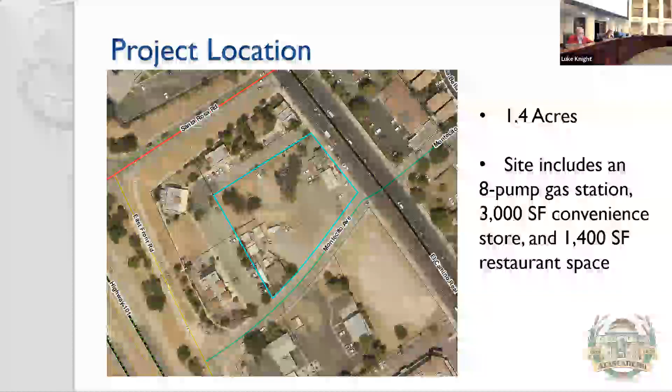Just a little bit of context here. This is a 1.4 acre lot, which includes an 8 pump gas station, 3,000 square foot convenience store, and 1,400 square foot restaurant space. As you can see in this aerial imagery, neither our GIS system, Google Maps, nor Bing Maps has an updated aerial quite yet. It's a very new build. The best we could get is kind of a dirt lot here, but just imagine a gas station.

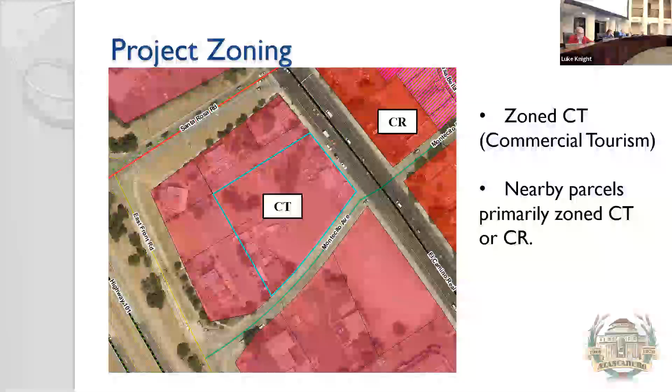It is zoned CT, commercial tourism, and nearby parcels are primarily zoned CT or CR. As you can see on the southwestern portion of El Camino Real, it is largely CT, commercial tourism. To the northeast, largely CR, commercial retail.

So just a bit of a summary here. The applicant is proposing 768 square feet of signage and chroma color banding around the gas station canopy, as well as a LED lighting strip. These current requirements that this project is being compared to are based on a 2019 design review committee hearing for the gas station itself, under project ID pre-19-0034. During this hearing, the design review committee recommended the removal of the high chroma banding that we are now discussing today.

The proposal is identical to a previous administrative use permit, project ID 22-0063. However, we are here at Planning Commission rather than an administrative use permit hearing, essentially because this is an appeal. It's not technically an appeal, but in a practical sense it is. The applicant missed the 2-week appeal period and is now resubmitting for reconsideration. It was determined by staff and by our community development director that this should be escalated to Planning Commission, considering this is essentially an appeal of that prior administrative use permit hearing denial.

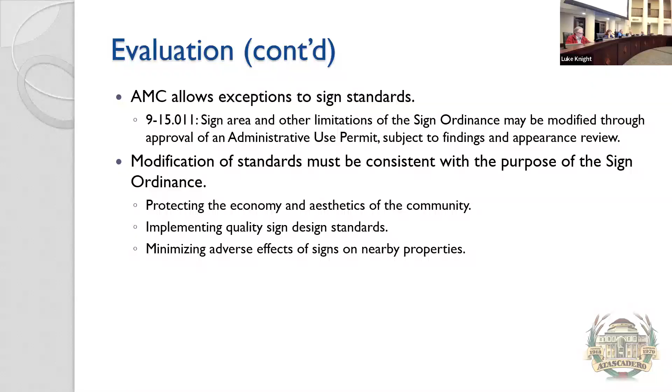Additionally, Atascadero Municipal Code does allow exceptions to sign standards. Section 9-15.011 notes that sign area and other limitations of the sign ordinance may be modified through approval of an AUP, subject to findings and appearance review. The modification of standards must be consistent with the purpose of the sign ordinance, which can be put down into 3 bullet points: protecting the economy and aesthetics of the community, implementing quality sign design standards, and minimizing the adverse effect of signs on nearby properties.

So the canopy coverage area of this gas station canopy is 4,388 square feet, and it contains 8 pump islands, as I mentioned in a prior slide, and that makes it one of the larger canopies in the city.

All of our recent canopy permits and use permits issued for canopy amendments have adhered to maximum signage requirements. There haven't really been any exceptions made in recent years. So this would be somewhat setting a precedent as to making exceptions for signage requirements on gas station canopies.

Now, as it is today, the station is directly adjacent to El Camino Real and is readily identifiable as a gas station, and specifically as an ARCO station, with the existing signage.

At the previous administrative use permit hearing, the hearing officer found that the proposed signage increase was inconsistent with the required findings that need to be made in order to approve an increase like this. There wasn't one specific finding that it was found to go against, but all of the findings that were provided, the administrative hearing officer found that they weren't met by this project.

So here are the findings that would need to be met in order to approve this project. The first is that the modification of the applicable standard won't result in a project that's inconsistent with the general plan. That the modification of that standard won't result in a project that is inconsistent with the character of the immediate neighborhood or contrary to its orderly development. And lastly, that it will not result in a project that is not in compliance with any pertinent city policy or pertinent city criteria adopted by ordinance or resolution of council.

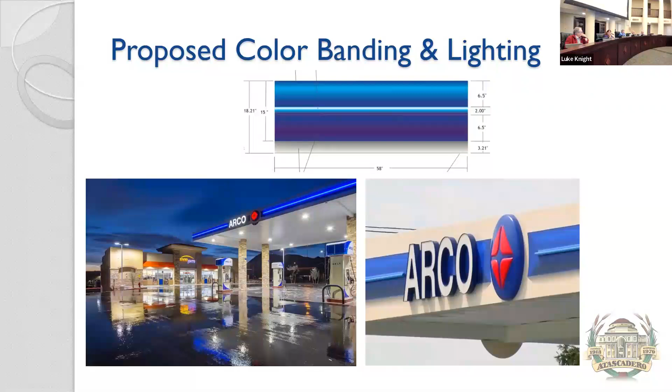I have a question and a comment. The banding allowance now is how much, compared to the 748 extra square feet they're requesting? So as I understand it right now, let me go back here - I believe it is 20 square feet of signs, logos, and/or color banding on no more than two sides of a Pump Island canopy structure.

Okay, and the question I had about the lighting - I'm not so concerned about the color banding because that's neutral. I'm worried more about light pollution at night. From someone who lives right across the street from a gas station, it's a big difference between seeing a flashlight in a field pointed down and seeing a flashlight pointed at your house. Big, big difference. The fact that these lights would be exposed horizontally versus - you can have way, way bright lights pointed down, but they don't wash out across fields.

You'd have to look in that direction to see them, but they're not washing out from the perceived eye - it almost is a background light. So I'd be leaning towards not worrying so much about the color banding, that's kind of a daytime notification for people looking for something that stands out. But the nighttime light, I'm kind of concerned about that being distracting to people living in the area, especially up on that hill on the back roads - you can see that from pretty far away.

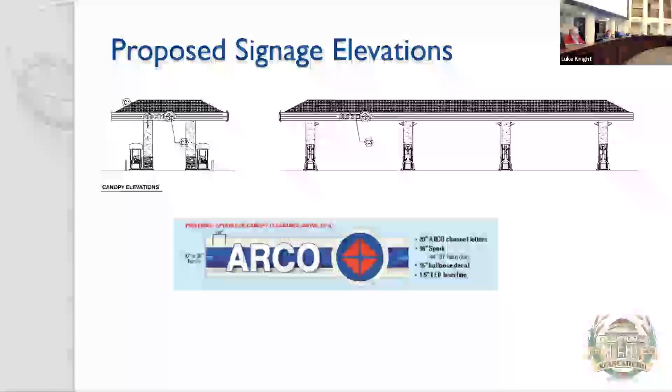And I am not including the recommendation of staff to recess or modify the lighting in the way that's suggested in that condition. Can't quite understand it. So just to be clear, you are making a motion for the approval resolution, but with the exception of that condition to shield or redirect the light. Is that correct? Okay.

I will second that motion. Does that include changing in the conditions CUP to AUP? Yes. Commissioner Schmidt, yes. Vice Chairperson Keen, yes. Commissioner Anderson, no. Commissioner Heath, no. Chairperson Vanden Eyck, no. Motion fails.

The only thing that got me on that, if we can have just a discussion, was no shielding of the light. Actually, if we could do it with no light at all, I think I could approve that, no problem. But I'll make a motion that we approve draft resolution B as outlined.

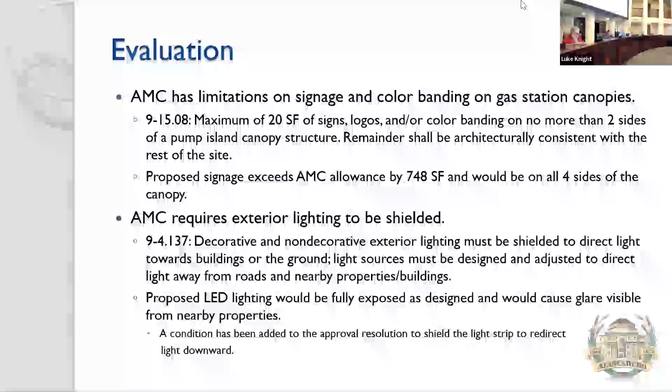that we have is our objective design standards. So we're going to turn that over to our community development director for that. Yes, and then I'm going to turn it over to our planning manager, Kelly Gleason, to present objective design standards. But first, I'm going to pick on one of you, like I mentioned before, to outline a clear definition of objective versus subjective, Commissioner Schmidt.

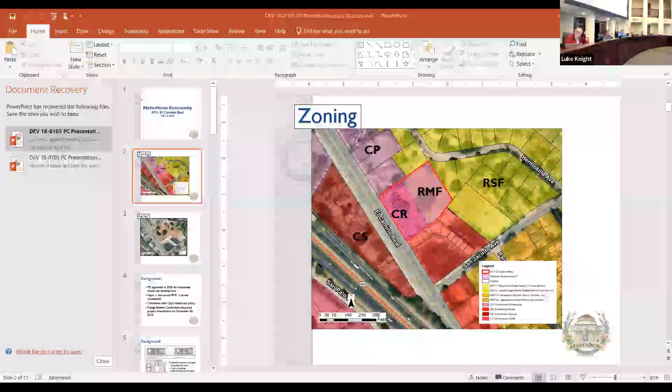So that's what this discussion is really about. It's about objective versus subjective, but Kelly's going to give you a lot more detail than that. It's actually quite interesting. This is really a streamlining of permitting and design review so that we can actually entitle projects without having to go through a discretionary process like this. Anyway, I'll leave you to it, Commissioner Schmidt.

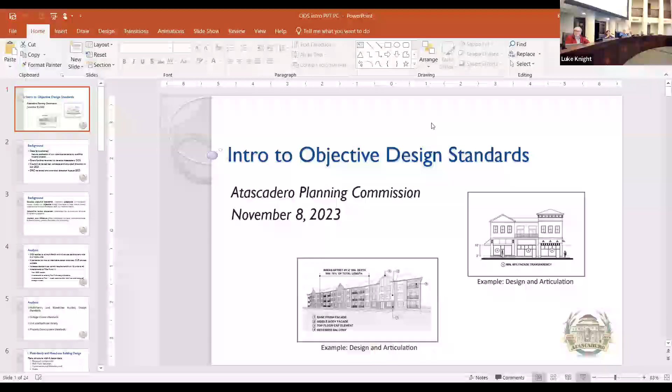Well, before we release that, Kelly, you've kind of summarized it yourself. I would say if there are subjective requirements or conditions, they're discretionary, whereas objective conditions are not discretionary, and we're not choosing to use them the way that we might individually feel. I would imagine that the objective conditions we're talking about fall within categories, so there might be a category with 4 objective conditions within it that you can pick from to apply to your project.

Perfect. Thank you. I think we can have more commissioner comment when we get to that section. But right now we've prepared a presentation to go through an introduction to our objective design standards. We've been working on this project for quite some time. It's a grant funded project we received to complete with our consultants, MIG. We've developed draft standards that we're introducing you to this evening so you can have time to ponder them and think about them. Then we'll be bringing a draft back as an ordinance for recommendation to the city council with any suggested changes you might have this evening incorporated.

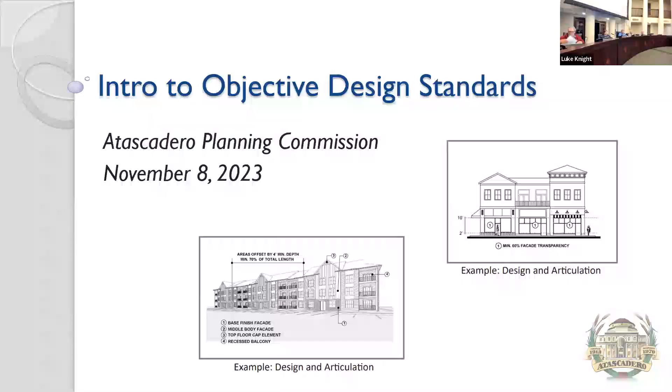So a little background: there have recently been state laws adopted that apply to certain housing projects, not all of them, but certain ones. Some require application of only objective standards to specific housing developments. A lot of those developments either include affordable housing or meet some other criteria. The city did receive grant funding to develop objective design standards for Atascadero. Even though only certain projects are subject to these standards through state law, we are writing design standards in the city of Atascadero to apply to all housing projects. We are looking to make more housing projects ministerial rather than discretionary, so there is certainty in application of design standards, allowing housing projects to move forward in a more streamlined way.

The city council reviewed key concepts developed by MIG through discussions with the council and the public, and provided direction in July of 2022, which seems really far away right now. We also took these draft standards to the design review committee for comment and made a couple of modifications based on their input.

A little background on objective design standards: these are objective standards, so we can't have some 'shoulds,' we can't make it consistent with something over here. We have to be very clear about what we're looking for—numerical values, material changes, how many materials or colors you can use on a building, very specific roof forms, very specific setbacks. I know they look really long, and I know you've got them in your staff report, but this is the way the state is going to provide certainty to developers, applicants, property owners, and the city about what can be built, to streamline housing development. We also get a chance doing this to impress some local influence.

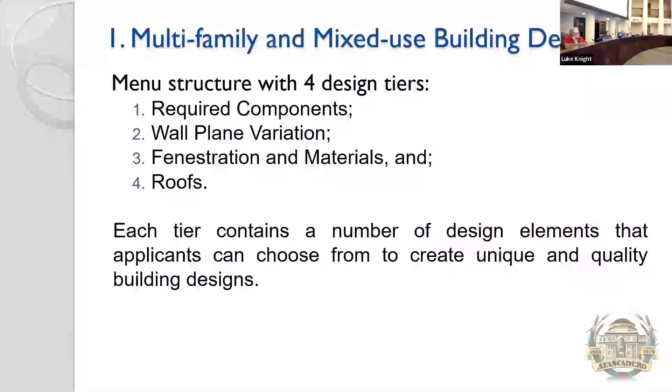Some attention to wall plane variation to ensure that larger buildings are broken up in a manner that helps create and maintain a pedestrian scale for these projects. Fenestration and materials, so how we treat the facade with windows, different colors or different material choices, and then how we deal with roofs. Each of these tiers contains a number of design elements that people can choose from, and there's a different amount that you choose based on the size of building that you are proposing.

So this is a little bit of the breakdown of how that would look in terms of a menu. Our consultant has created some categories for types and styles of buildings, larger buildings such as mixed use buildings. We've broken that into a couple different categories based on the width of the building to ensure that we maintain some flexibility and don't over analyze the standards and apply them for buildings that are narrower in width.

We also have the multiplex, which is 5 or more units within one building, and again, different standards for longer buildings rather than more narrow buildings. And then we have the duplex, triplex, fourplex, and cottage cluster, which would be smaller scale units, and you can see those have less standards that they are required to meet.

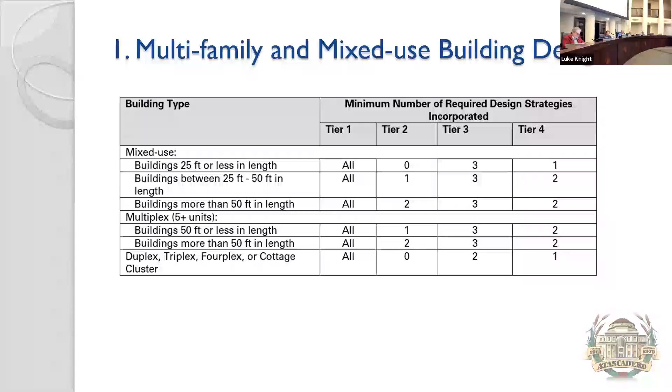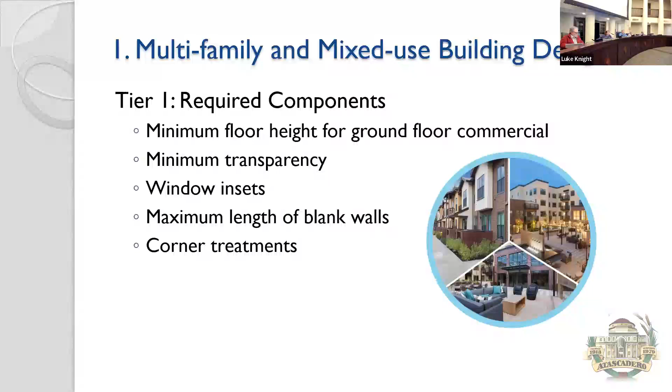So in terms of tier 1, these are required components. In our menu of options, we relate to things such as minimum floor height of ground floor commercial uses when you're in a mixed use building, to ensure commercial and economic viability of the ground floor commercial spaces in those types of buildings. We have standards related to minimum transparency, so ensuring that we have windows and proper facade detailing to create good aesthetics. Window insets, small details that make big differences on buildings that can be done to every building to ensure that we get some shade and shadow that provides some good visual cues. Maximum length of blank walls, and then corner treatments where buildings are located on the corner of two streets. So these are kind of elements that all buildings need to incorporate, kind of the baseline.

In terms of tier 2, we have design strategies related to wall plane variation, the facade of a building.

I don't think that that should be changed. Sam, sorry, give us one second. I want to make sure we're still recording.

These strategies include incorporating a plaza or forecourt, some sort of setback within your building plane that provides variation and places for people to gather in outdoor use spaces. Upper story step backs create variation along the upper floor of buildings. It could be the inclusion of balconies along a facade that create shade, shadow, and undulation within the facade itself, or another sort of general massing break within the building design.

Somebody could bring a whole section of the building forward or backward to create that massing break. In Atascadero, we hear a lot about the importance of the brick facade and maintaining that colony architecture connection, even if it's not in the same architectural style. So we provided some allowances and credit for people that wanted to do a full brick facade building to fit in with that Atascadero identity feature.

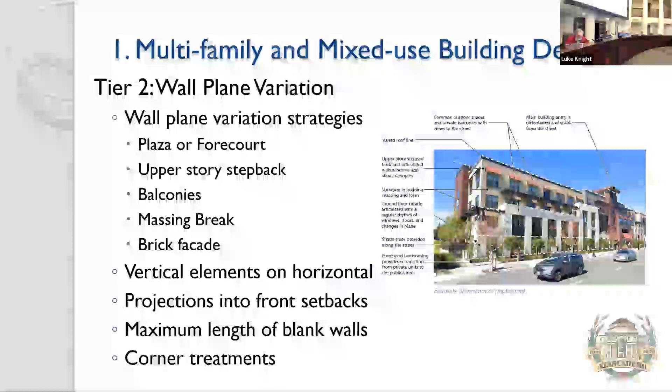Tier 3 focuses on fenestration and materials. We have things that are additional to a facade, like awnings. There's a credit if you increase the area of transparency beyond the baseline level to add more windows and more variation along the facade. The use of window trim, higher quality window materials, lintels, windowsills—these are tinier details around some of those typical facade detailings and features.

Decorative facade trim, some cornices, secondary cladding material. So we're starting to get into materials and things that we apply to a facade to enhance some of the features as part of the design.

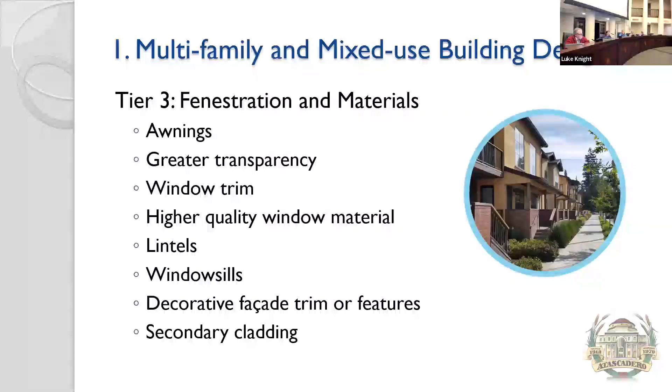Our last tier is roofs. There's a lot of variation you can do with roofs that create shade and shadow. There's also benefit to some flat roofs and roofs with parapets, especially when we think of a downtown type streetscape. So we wanted to make sure we allow for both, so that we're not taking away a design consideration within any portion of the city.

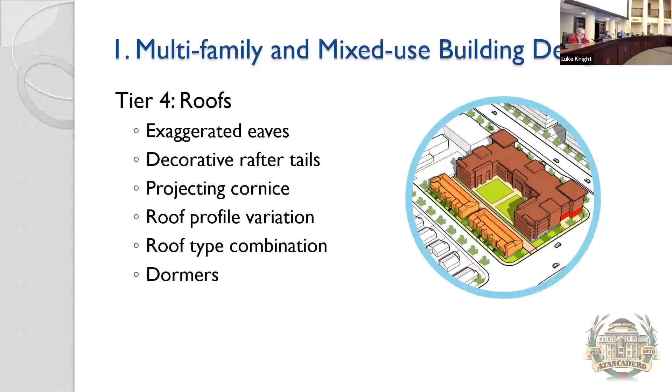Some of the things we can do with roofs are exaggerated eaves if we have a non-flat roof, or even a flat sail type roof, decorative rafter tails, a projecting cornice applied to flat roofs and roofs with parapets similar to what we see in the downtown area. Some roof profile variation—differences in height or slope of roof—and roof type combination. So maybe we have mostly a flat roof with a parapet, but also a shed roof over a corner feature or tower element at the corner. And then the inclusion of dormers, which is probably most applicable to a residential style design.

What we've done is add some additional standards for what happens within those features—some definitions to ensure people know when they need to add an entry feature, what does that exactly mean? If they add a porch, what does that mean? What are the standards for porches? What does it mean to add an awning? What does it mean to have a balcony? Does a Juliet balcony count, or does that not count? So we've added some standards and definitions for some of those features referred to in our menus of options. And in particular, we also looked at building height.

We've heard from council and the community that the height in downtown really needs to be increased to create a greater sense of place and have some additional opportunity for larger scale mixed use developments. So part of this objective design standard update is to increase the height in our downtown core to 55 feet, with some allowances for roof projections if somebody wants a non-flat roof. We will not be increasing height in other areas of the city until the general plan update, if anything comes out of that.

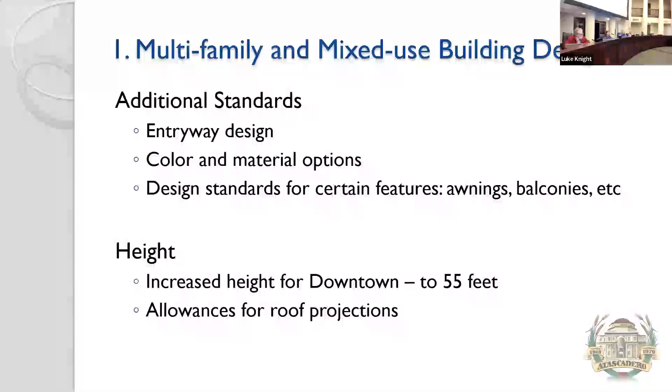One of the council's key directions was also to look at transitions between our multifamily and mixed use zones and potential adjacent single family zoning designations. Our single family lots tend to be slightly more rural in nature, and when they are placed next to multifamily or mixed use commercial zoning designations, there can be some incompatibility in terms of building design and massing.

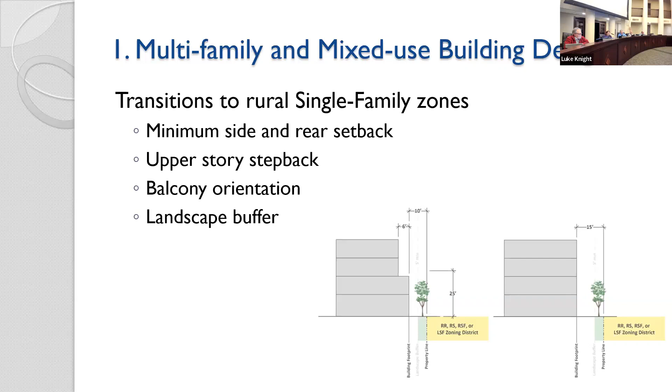So we do have a section related to transitions to rural single family zones that would require some additional step backs of the upper floors of buildings, or require a greater setback for the entirety of the building, ensuring that there is some landscape space area as well as additional setback to the upper floors. The standards also talk about balcony orientation, to make sure that on a mixed use building we don't put all the balconies right up against the backyard of adjacent single family properties to the greatest extent possible. And again, that landscape buffer ensures there's enough area for some taller or more dense shrubs and trees to grow.

One of the concepts that we've worked hard on with our consulting team is the cottage cluster development style. We have a lot of interest and there's been a lot of intrigue about our microhome development on the north end of town, regardless of implementation. I think the site design was very well received for that project. And so we wanted to give people the opportunity to move forward with similar type developments, where they are individual cottages or duplex units oriented around common open space areas, with minimal private yard space and reduced attention to vehicle and access spaces.

So we developed standards for a cottage cluster development. If you are doing single family or duplex units, a majority on a multifamily site, there are certain standards for how those units are oriented, how much common open space area is available, and what kind of fencing you can do within those standards. If you meet those standards, we would then allow subdivision of those styles of development. Currently our minimum lot size in the multifamily zone is half an acre, and if you met these cottage cluster standards, you would be able to do sort of a postage stamp development - the footprint plus 3 feet, or whatever building code would require based on the design of the subdivision.

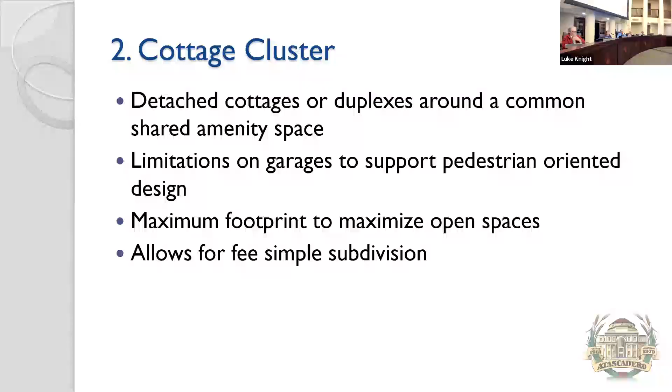Part of those standards also include a maximum footprint area, in order to maximize open spaces and ensure that there is balance between the usable private unit areas and what space is taken up with buildings, and the common open space amenity areas, to ensure that there's some quality spaces to enjoy as part of those developments.

Fractional density was also a big topic at the city council. Fractional density basically uses unit size to determine the allowed number of units. Right now our density is solely based on the number of units, so 10 units per acre would mean 10 400 square foot units on an acre, or it would mean 10 2,100 square foot units on an acre. We don't differentiate between what that might look like in terms of the area that gets developed - it is simply how many units you can do on a property.

So the use of fractional density allows us to count smaller units as less of a density unit. You can see in the current proposal, units up to 600 square feet would only count as half a unit, so you could do 2 600 square foot units where previously it just counted as 1 unit. This allows a greater number of units to be developed on a site under our current density standards. It encourages smaller units, it encourages affordability by design, and it encourages maximizing the footprint area that you can build within, to maximize the number of units that you can achieve.

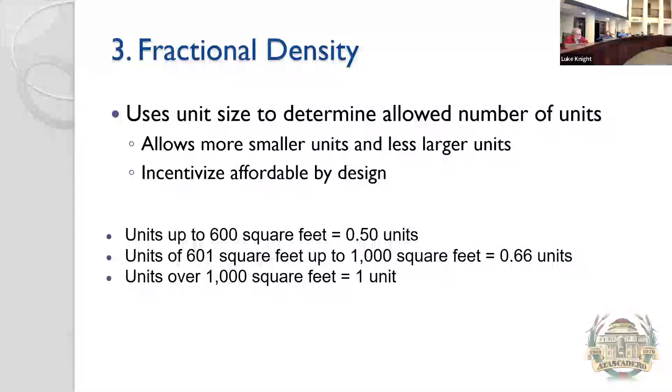Under our fractional density section, the way we currently have it written is that fractional density would only apply to the high density residential zone. There's a couple pros and cons to applying it to our medium density residential zone. We will also probably have more residential multifamily zoning districts coming out of our general plan. So we are seeking direction from the commission on whether it's appropriate to apply fractional density to our medium density residential zone.

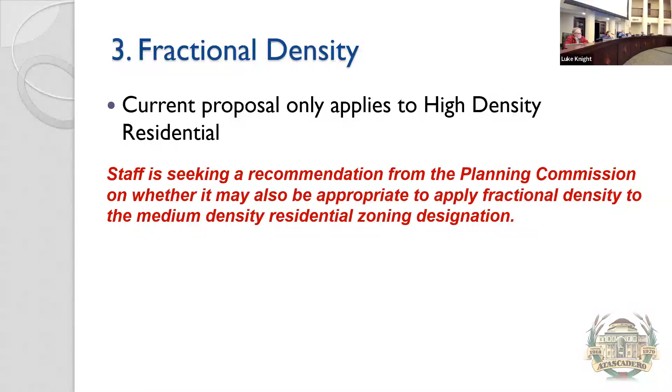Our medium density residential zone is generally that transition zone between single family and multifamily. So there's a certain level of analysis on whether it's appropriate to have more units. They're not necessarily taking up more space. They still have to fit within the same developable box area, the same height, and still have to meet parking requirements. But is there a disadvantage to having more smaller units in those transition areas? Or is there not? We're seeking Planning Commission's direction on that this evening.

As part of fractional density, we also have a maximum average unit size applied to the downtown area. This was the direction given by council to apply it only to downtown to encourage smaller units in the downtown core. So fractional density would also apply as an incentive, but they looked at capping the maximum average unit size to 1,200 square feet in downtown mixed use development. That doesn't mean any unit can't be larger than 1,200 square feet. It just means that if a unit is larger than 1,200 square feet, there needs to be another unit in the development that balances it out to the average of 1,200 square feet.

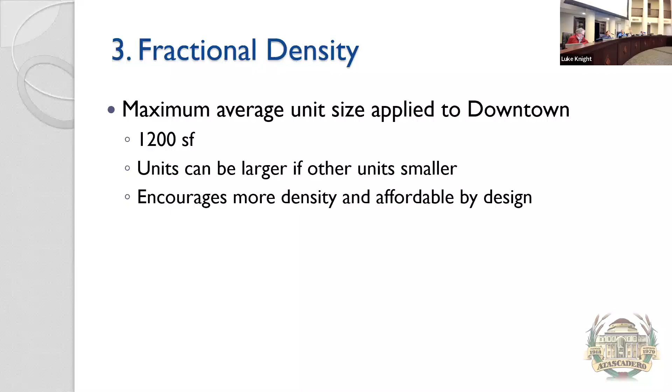Property development standards. I feel like I'm talking at you guys a lot. Maybe it's time for just a pause and a stretch. Kind of raise your arms up a little bit. There is a lot here. We've been working on this for years, and that's kind of why we're bringing you a piece of it right now. We're kind of introing you to the whole thing. If I were you, I would be totally perplexed.

You'd be kind of like, what is all this stuff? We're going to go back. She's going to rip through the whole thing, and then we're going to go back and forth through some of these themes. There's some big ones here, like fractional density is huge. All these things are big. We were going to come through and make a recommendation to you tonight to make all these changes to the zoning. But I thought, you know what, we stepped back and said we got to bring this as an intro, warm up to it. Council's seen this a couple times. We've been batting this around for a year or two, but now's your chance to kind of just look at the general picture where this is going. And then we're going to come back to you with an ordinance.

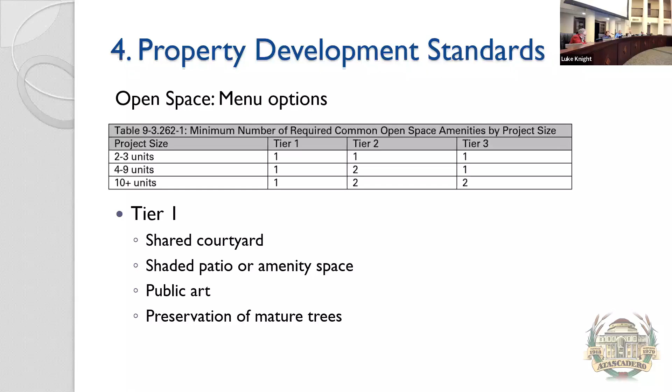We also have the allowance for public art, so if somebody wants to incorporate some public art into their project, that would be a quality shared amenity as well. And then the preservation of existing on-site mature trees, to allow for those sites that do have mature trees and mature shade canopies to have some flexibility around their design and not have to necessarily overdevelop amenity spaces.

In terms of tier 2, we have things like outdoor seating, things that add to the amenity level of those spaces. Dog runs, children's play areas, sports courts, which would probably be more on a larger scale project, we would see that. Pools or spas, an outdoor kitchen, and we provide definitions for what an outdoor kitchen is. It's not necessarily a hibachi barbecue on the ground in the middle of some pavement, it would have some amenities with it that help support that as an outdoor kitchen.

A fire pit, which is very popular today within amenity spaces, and again the preservation of native trees, so not just focusing on any mature trees, but specifically native trees in this tier.

We also wanted to ensure we had an allowance for smaller projects to use their shared driveway area as a shared amenity space. Some of our lots are very narrow, and in order to meet density and parking requirements, we see a lot of configurations where there's a shared driveway down the middle of a project site and parking off to the side. So for smaller projects that don't have space to be flexible with other outdoor amenity areas, we added a parking court allowance, provided that driveway space had certain design features like pavers or stamped and colored concrete, and that the parking could be accommodated off of that area so it could be used as a neighborhood gathering space.

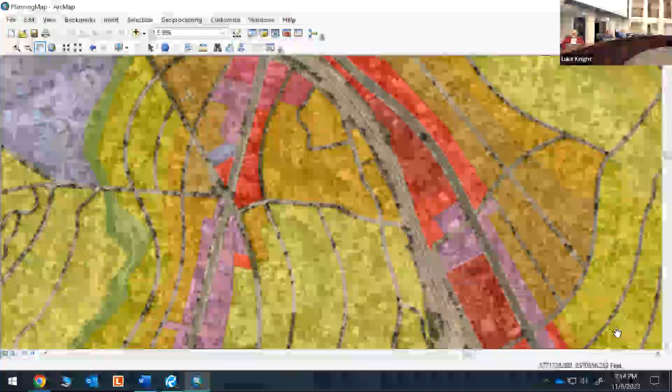It's very difficult, because objective standards by their nature cannot be flexible. So we came up with the menu to try and add some of that in. We also hope, by the time we come back to you, to have a developer/staff implementation checklist. It's a lot of words in our code and they have to be written a certain way, but our hope is to have a handout and checklist that helps people immediately move through the menu of options.

It should be very easy to say, did I meet that? Did I not meet that? How many check boxes in this category did I need? How many have I checked? We're hoping to streamline that process as much as possible, both for our applicants and for staff plan checking those elements, because objective standards by their nature have a lot of detailed information and have to say a lot of very specific things in a specific way.

And I do want to emphasize the savings on staff time. I come from policy land, Kelly comes from architecture land. So when I'm reviewing multifamily developments and see something in our code that says it must integrate well with X or Y, I always have to go to Kelly and ask, well, what does that mean? So this will be a pretty great staff time saver as well.

There you go. Plus our time. All right, thank you. Let's open it up for public comment.